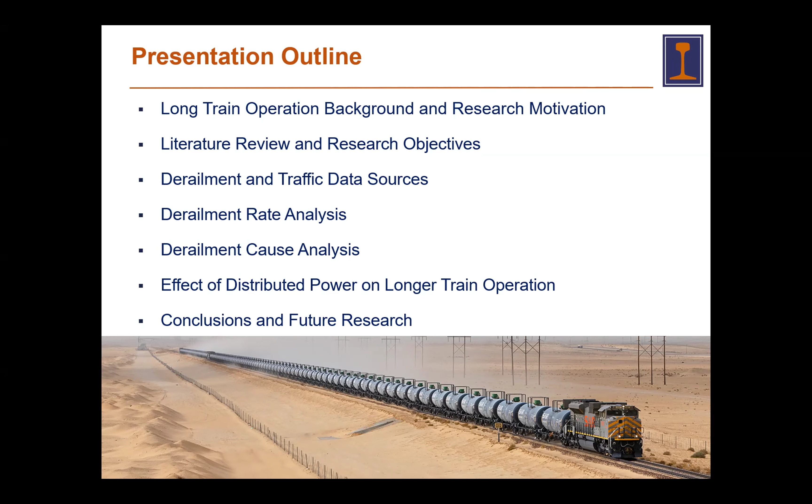Here's my presentation outline. I'll start with U.S. longer train operation background and research motivation, followed by the literature review and our research objectives for why we're doing this. Moving to the body, I have three main analyses, but before that I want to introduce the derailment and traffic data sources used for the rate and cause analysis. Then in the body, first we'll look at derailment rate analyses, then derailment cause analyses, and lastly I'll talk about the effect of distributed power on longer train operation. I'll conclude with conclusions and future research.

In the US, freight train length is usually measured by the average number of cars, or number of wagons. This remained steady from 1960 to 2000 at about 70 cars per train. Beginning in 2000, train length began to increase, rising about 12% over the next 20 years.

Moreover, the use of distributed power, or DP, also enabled operation of trains as long as 14,000 feet. In other words, the use of DP actually accelerated this process of adding more cars to the train.

We know there are many operational and economic benefits of operating longer trains, such as reduced operational costs and improved energy efficiency. However, they also have some operational and safety challenges. For example, operating longer trains may cause greater delays on single track corridors, potentially reducing network capacity, and assembling longer trains in the yard can complicate operations and reduce terminal efficiency.

The Government Accountability Office and National Academy both suggested that longer trains may increase risks related to train handling, brake reliability, and possibly crew fatigue. That said, derailment risk, which encompasses the derailment rate and severity—severity usually measured by number of cars derailed per derailment—associated with train length needs to be further analyzed and understood for operating longer trains.

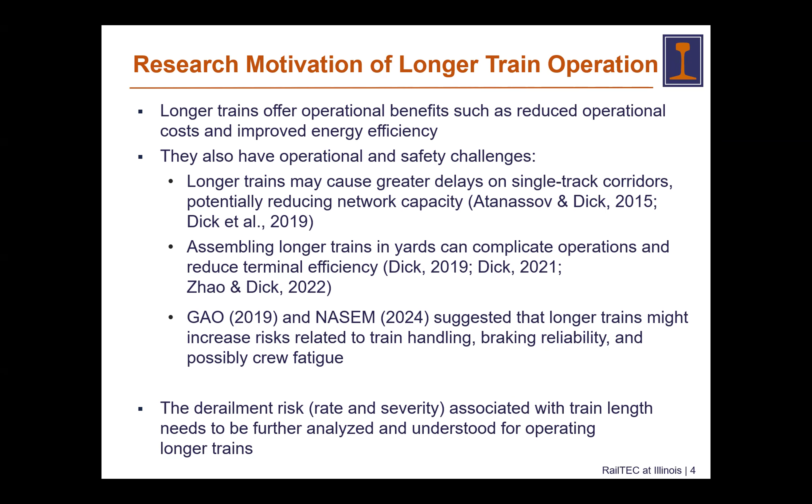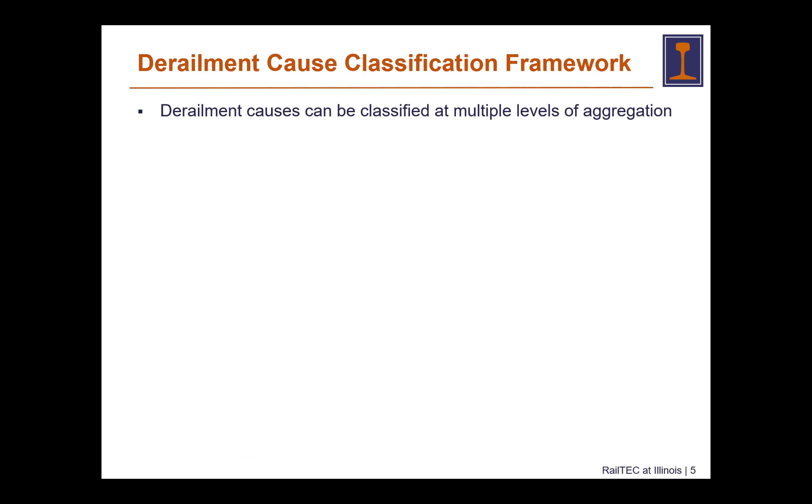Speaking of derailments, there are many causes that can lead to a derailment, and derailment causes can be classified at multiple levels of aggregation. At the bottom level, the most finer grained classification, we have the Federal Railroad Administration (FRA) train accident cause codes. FRA classifies all derailment causes into 398 unique cause codes.

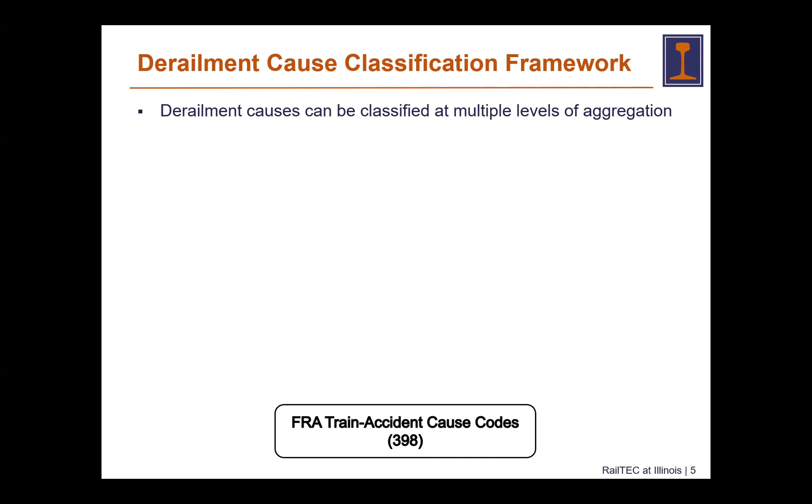On top of that, there's one also commonly used in academia: the AAR-ADL cause group method, which groups these 398 FRA cause codes into 52 unique cause groups based on similar engineering failure mechanisms and prevention strategies, established in 1996.

On top of the AAR-ADL cause groups, there's one more layer of aggregation—we can classify them into major groups. One commonly used classification method is the major cause category, where all groups are classified into either track-related, equipment-related, human factor, signal, or miscellaneous related causes. These are the 5 major cause categories commonly used in the US. In addition, there's also a classification framework called the train-mile related and car-mile related derailment cause classification framework.

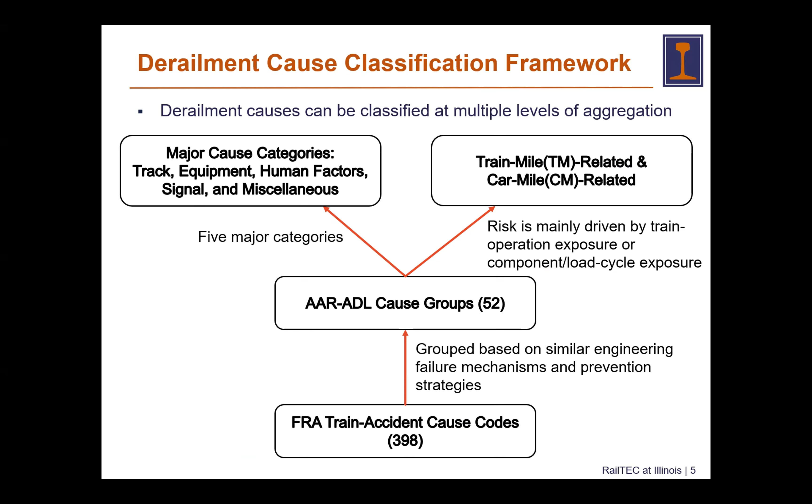So if a derailment's risk is mainly driven by train operation exposure, in other words train miles, then this derailment cause is likely to be classified as a train mile related derailment cause. On the other side, if a derailment's risk is related to component or load cycle exposure, then it is more likely to be classified as a car mile related derailment cause.

Let's dive into more details about these train mile and car mile related cause groups. For train mile related causes, those are causes whose accident opportunity is primarily proportional to the number of trains operated and the distance they travel. In other words, they're driven by train operation exposure. For example, they may include failure to obey signals, grade crossing collisions, and switching rules.

For car mile related causes, those are causes whose accident opportunity is primarily proportional to the number of cars moved and the distance they travel. So their derailment risk is mainly driven by the component or load cycle exposure of track and rolling stock. For example, they may include broken rails or welds, coupler defects, and broken wheels. Putting it another way, car mile related causes may also refer to fatigue related failures.

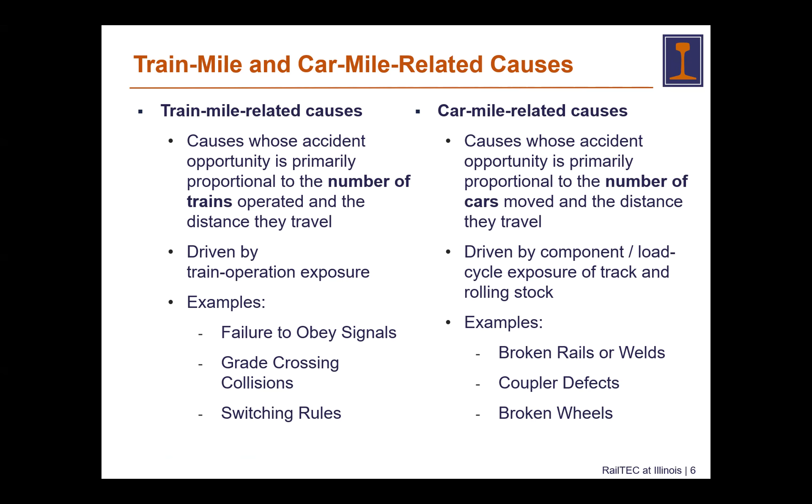In previous research, researchers have linked train length to expected derailments through train mile and car mile exposure. Wang in 2019 proposed this theory: the expected number of derailments can be calculated as the train mile derailment rate multiplied by the train miles, plus the car mile related rate multiplied by the car miles. In this slide, on the left-hand side, we have a chart giving the expected number of derailments for a single train with train length difference.

On the x-axis we have train length, and the longer the train, the higher the car mile related derailments, whereas the train mile related derailments remain constant. Since we're only operating one train, the train mile is constant.

The second chart gives the expected number of derailments for a fixed volume of traffic. If we operate longer trains, it will reduce the amount of train miles we need to travel, so the train mile related derailments will decrease. Since the total amount of cars we need to move from A to B is constant, the car mile related derailments will stay the same, as you can see in this chart.

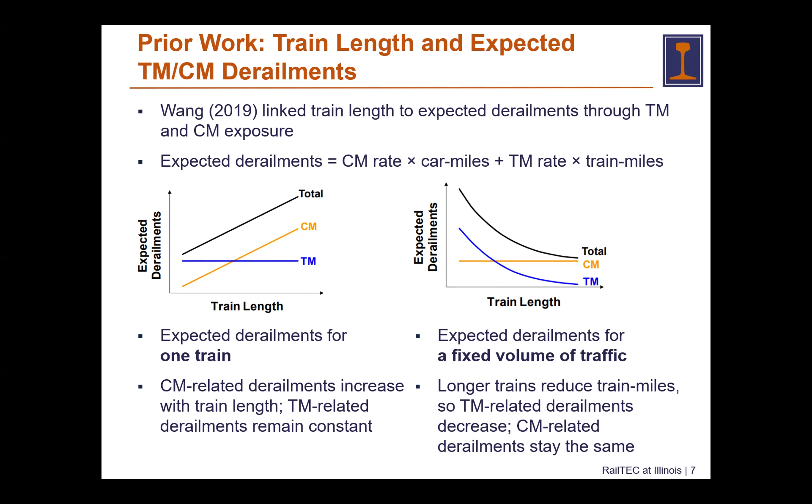So Wang really established this exposure-based framework for train mile and car mile related derailment risk estimation in 2019. However, there's a very strong key assumption in his theory: the train mile and car mile related derailment rates are treated as average rates primarily determined by traffic exposure. In other words, train length detail within each exposure group, train type, or segment level grade and curvature, none of that had been explicitly modeled or discussed in his theory.

Wang also acknowledged a possible upper limit where very long trains may increase derailment probability, but this effect is not directly estimated in his model, largely due to limited exposure data by train length and train type. So in this study, we wanted to address these gaps.

Previous studies have not directly estimated derailment rates by train length, largely due to limited exposure data by train length interval, train type, and railroad. In this study, we wanted to examine how derailment rates vary with train length, and specifically we want to answer four questions.

Firstly, what is the overall relationship between derailment rate and train length? Secondly, what is the relationship between derailment rate and train length for the three US principal train types, namely unit trains, manifest trains, and intermodal trains? Are there any particular causes associated with longer train derailment rates? And lastly, does DP reduce derailment rates for longer trains?

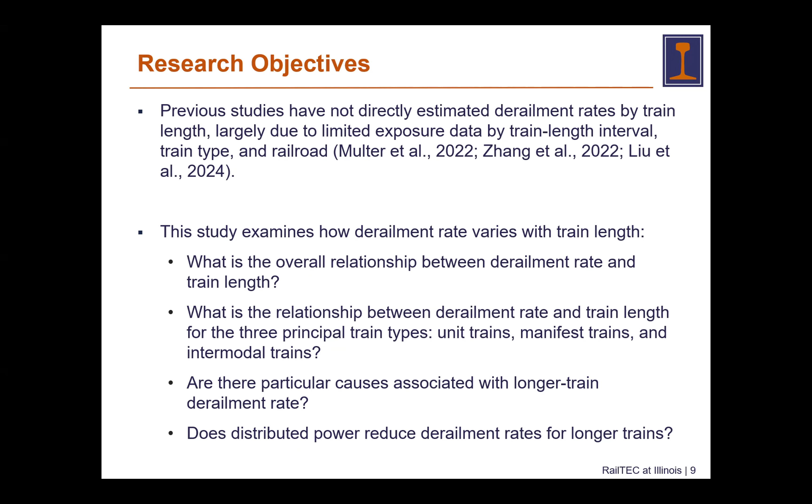Before moving on to the analysis and results, it's important to understand our data sources, namely the derailment and traffic data sources essential for our derailment rate analysis. Firstly, the derailment data: the US DOT Federal Railroad Administration, or FRA, data permits the calculation of the number of derailments by train length and number of rail cars.

Our study sample or population is Class I railroads only, and we only focused on mainline and siding train derailments. So we are not interested in any other accident types, only derailments. Our study period is between 2018 and 2025.

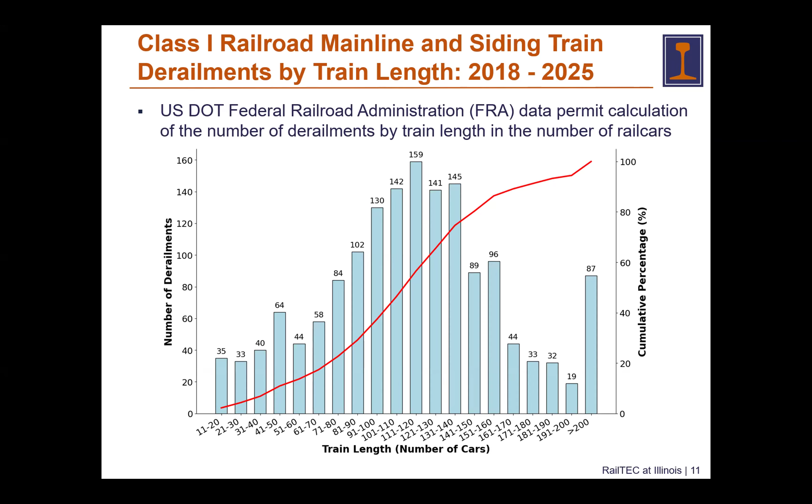In the past, detailed traffic exposure data, whether in train miles or car miles, by train length or by train type, has not been previously available to researchers. But we have been fortunate enough to have access to detailed traffic exposure data, and this is how it has been collected and analyzed within the group.

Data on train operations by train length. The traffic data was collected using the Train II system, which records railcar movement events reported to Railinc, a subsidiary of the Association of American Railroads. In the Train II system, these movement events are triggered when rail cars and trains pass automatic equipment identification, or AEI, readers.

So we have these car level event observations, and within the group we have an algorithm that aggregates these car level events into train level observations. Our definition is that whenever a set of rail cars are reported together more than once at different locations, they are defined as a unique train. We can do this for all car level observations in the network and group trains for the entire network.

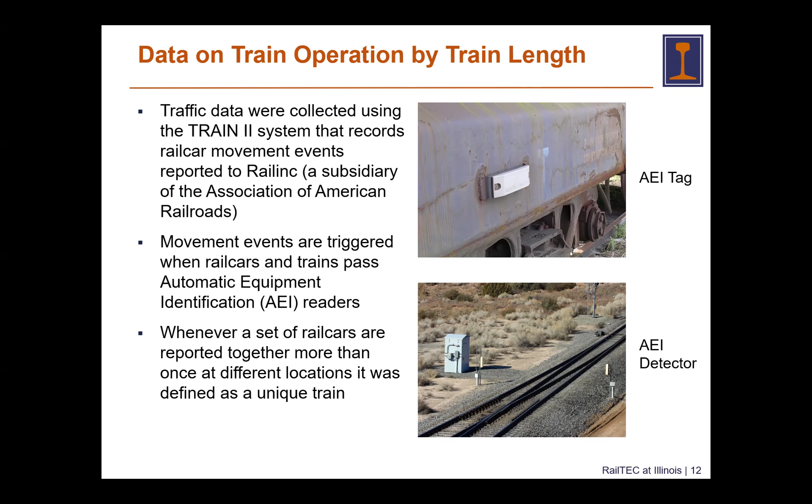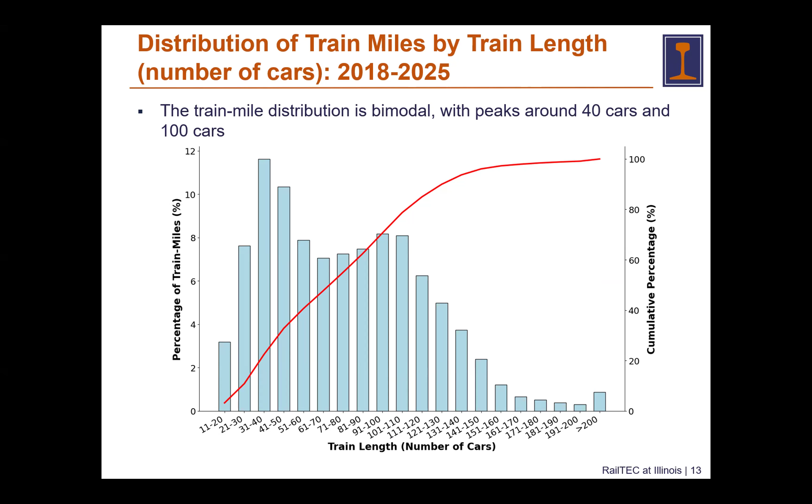In the introductory slides, I mentioned we're not only interested in studying the relationship between derailment rate and train length, but also in breaking them down by different train types, to see the train type effect. In the US, there are three principal North American freight train types: unit trains, manifest trains, and intermodal trains. Unit trains consist of similar rail cars carrying a single commodity, typically moving from one origin to one destination. In our traffic data, roughly 25.5% of all trains are unit trains.

Manifest trains are defined as trains carrying different commodities, in contrast to unit trains, using different types of rail cars and usually serving multiple origins and destinations. In our traffic data, manifest trains consist of the largest proportion, roughly 58% of all trains. The third type is intermodal trains, a special type of unit train carrying intermodal containers or trailers, typically on flat cars or well cars. They consist of 16.8% of all trains in the traffic data.

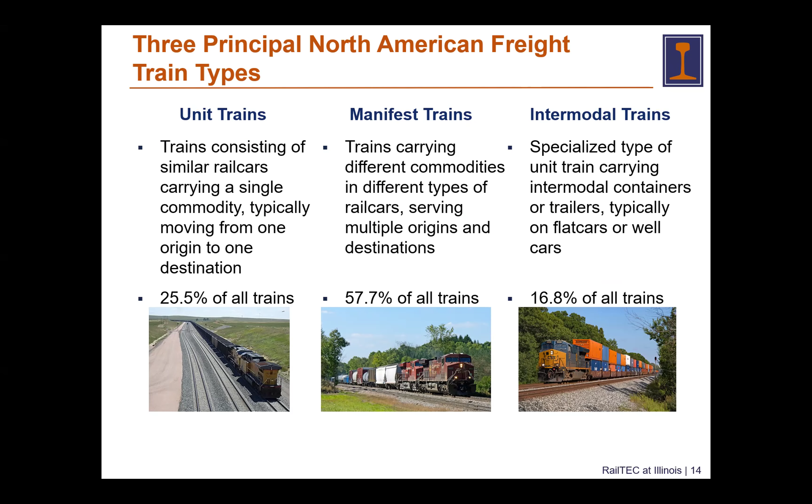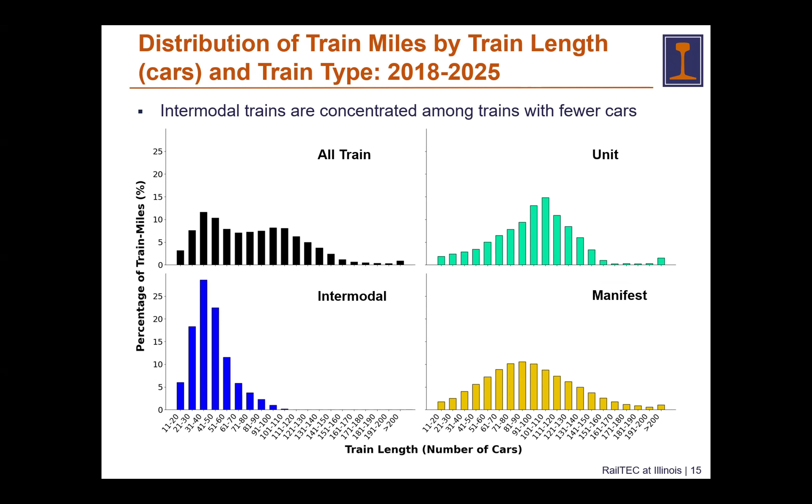So I'm going to introduce the idea that measuring train length by number of cars can sometimes be misleading. The wide range in freight car length means that the linear length of a train can vary widely depending on the type of rail cars in the consist. For example, I have two extreme cases here.

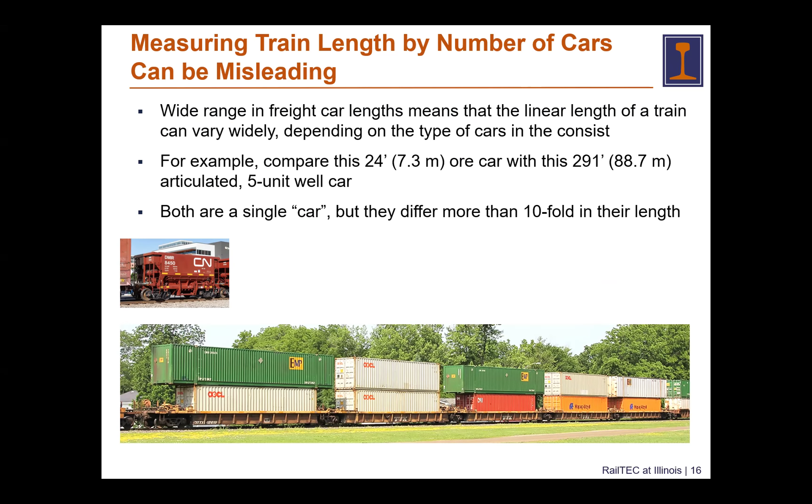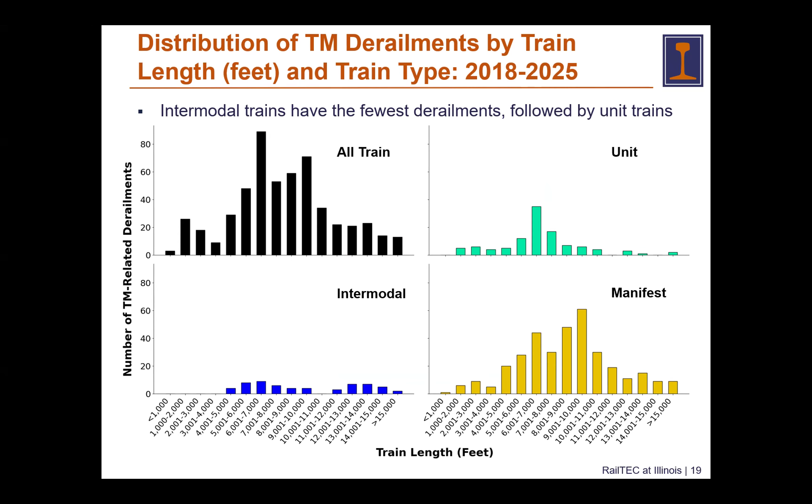Similarly, this slide shows the train mile related derailments by train length and train type. Again, intermodal trains have the fewest derailments, followed by unit trains.

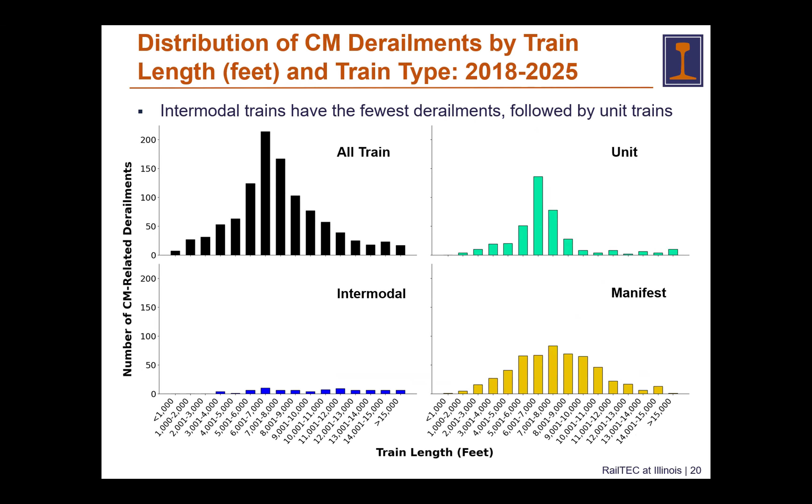All right, so now we have enough background for our traffic and derailment data. Now let's really move on to the results section. The first part will be the derailment rate analysis.

To remind everyone again, in this study we have two types of derailment rate metrics. The first is the train mile related derailment rate, calculated by the number of train mile related derailments divided by a million train miles. The second is the car mile related derailment rate, calculated by the number of car mile related derailments divided by a million car miles.

Again, we can break them down by train types. This chart shows you the train mile related derailment rates by train length and train type, and the clear association remains, right?

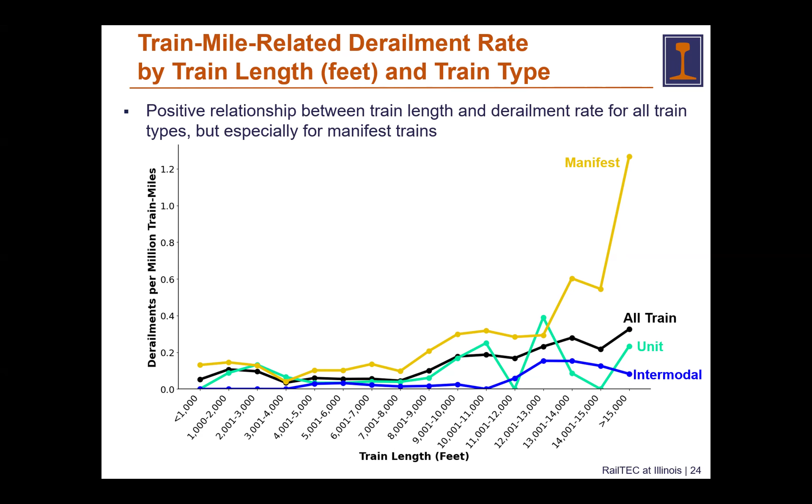Still, on average, unit trains remain the second highest derailment rate compared to intermodal trains. Similarly, this chart shows the car mile related derailment rate by train length and train type. Not surprisingly, as we saw in the overall chart, no relationship between train length and derailment rates for all train types was observed. But generally, manifest still has the largest derailment rate, followed by unit and intermodal trains.

So these are all the empirical results. We're going to build some statistical models to quantitatively evaluate the train length effect, the train type effect, and since we have 8 years, we're also going to study the year effect.

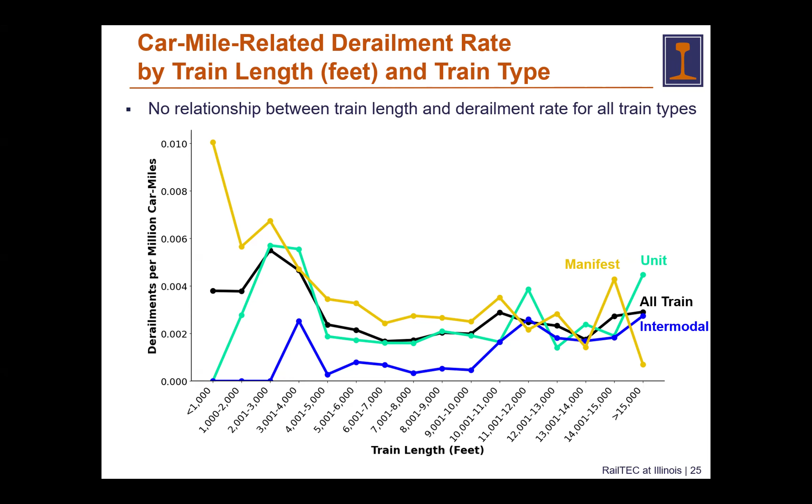The modeling result is also not surprising. Both train length and train type effect show a significant relationship. With the interaction term considered, this is how we interpret them: the train length effect differs by train type, which is exactly contributed by the interaction terms.

For unit trains, each additional 1,000 feet increase is associated with about 9% higher train mile related derailment rate. For manifest trains, each additional 1,000 feet is associated with about 21% higher rate. And for intermodal trains, it is 25% higher. Again, this is not suggesting that intermodal trains have a higher derailment rate compared to manifest and unit -- this is only giving us the rate of increase, not the absolute derailment rate. As we saw previously, it's really manifest trains having the highest rate.

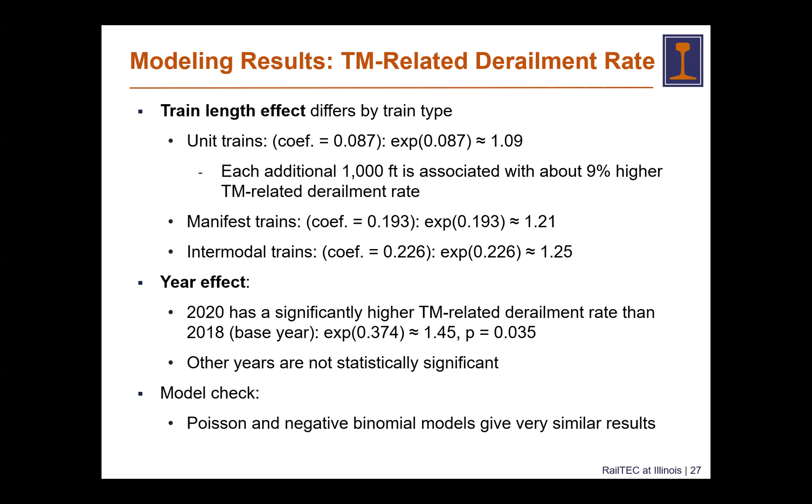Similarly, we can fit the same or a similar model for car mile related derailment rates. In the previous slide, we saw there's no significant relationship between train length, so I didn't include the interaction term here. I only have the length effect, train type effect, and year effect. The model result is also not surprising.

Train length is not significantly associated with car mile related derailment rate. The p-value is really large, 0.8, suggesting that the car mile related derailment rate per car mile is approximately constant across train length. However, we do see this train type effect: manifest trains have about 60% higher car mile related derailment rates than unit trains, and intermodal trains have about 51% lower car mile related derailment rates than unit trains. The year effect: car mile related derailment rates in 2024 and 2025 are significantly lower than in 2018, by 34% and 37% respectively.

If we want to visualize these two statistical models, this is how we can do that. This chart shows the predicted train mile related derailment rates by train length and train type. Universally, manifest trains have a higher derailment rate than unit and intermodal, and generally unit trains have a slightly higher derailment rate than intermodal trains. But intermodal trains start to have a higher rate at very long train lengths.

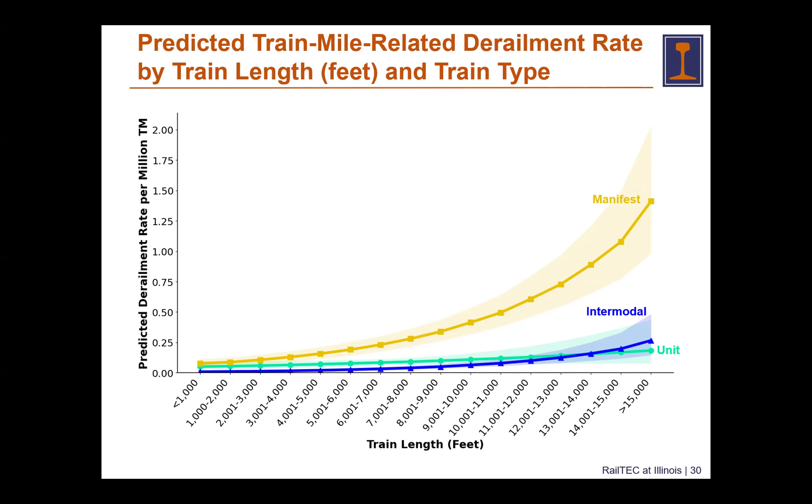So in this part, we analyzed the derailment rate by train length and train type, split into car mile and train miles. We learned there is a positive association between train length and the train mile related derailment rates. But it's more important to know why, right?

This leads to the second part of this presentation, where we dive into these causes and do a derailment cause analysis to see what's contributing to longer train derailments. As I mentioned previously, derailments can be classified into 5 major cause categories: equipment, human factor, track, miscellaneous, and signal.

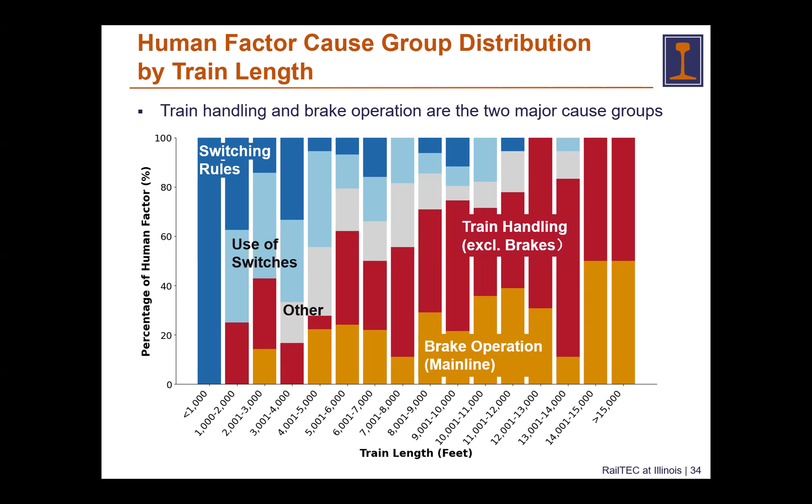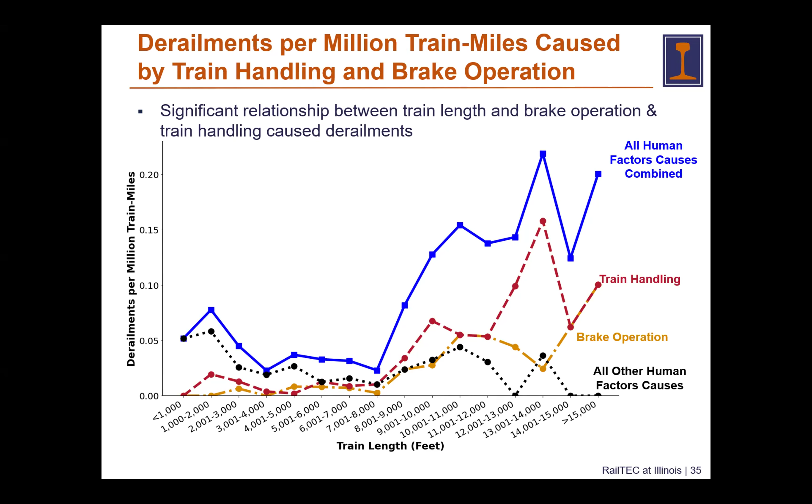Since we're breaking them down by cause group, we don't have that many data points, so I didn't include train type or year effect - only interested in the train length effect here. The normalizer, the exposure, can be either train mile or car mile, depending on whether this cause group is train mile or car mile related. Since we're doing many hypothesis tests at once, the p-values used to reject the null need to be adjusted for multiple testing. We used the Benjamini-Hochberg FDR correction, and the results are not surprising.

There are in total 3 train mile related cause groups that show a significant and positive train length effect: brake operation and train handling being two of them. These two actually have a surprisingly similar and the strongest effects. Both show about a 33% increase in their derailment rates per additional 1,000 feet increase in train length under the train mile normalization. The p-value is really small.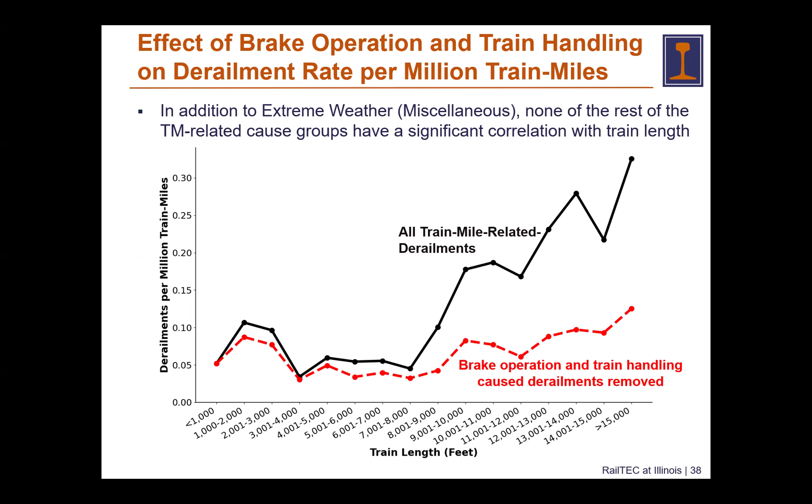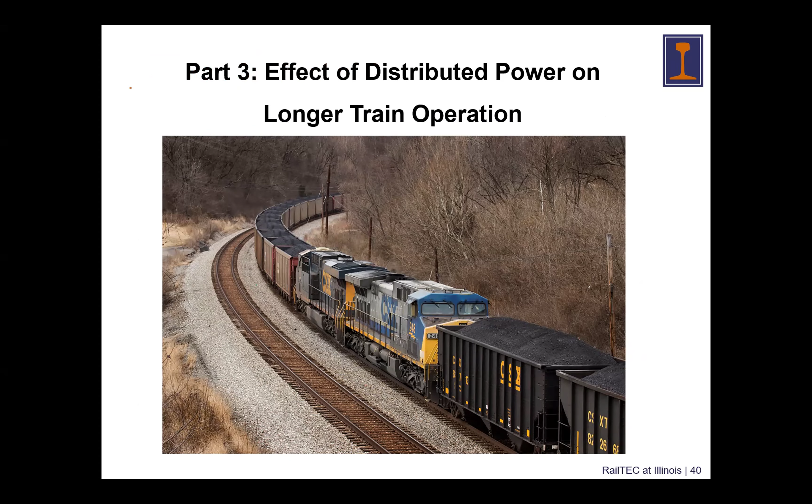This concludes our second part of the study. The third part, I'm going to talk about the effect of distributed power on longer train operation. This will also link to our just-learned train handling and brake operation related derailments. Distributed power trains, or DP trains, have their locomotives distributed along the train.

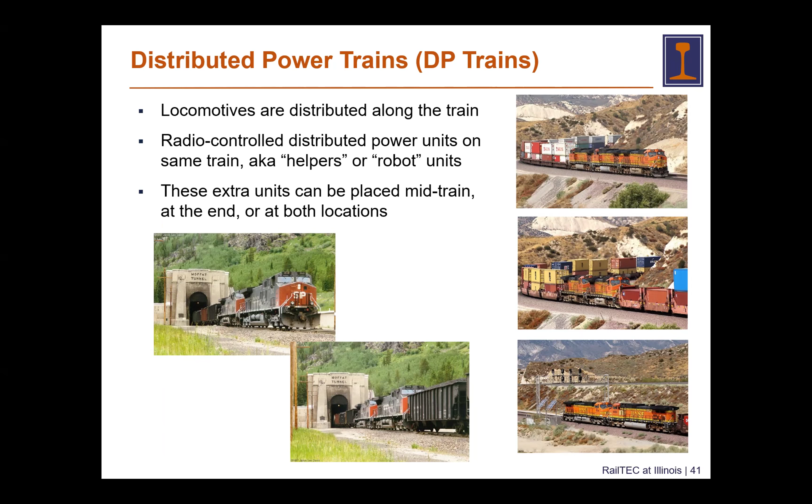They have radio controlled distributed power units on the same train, also known as helpers or robot units, and these extra units can be placed in mid train, at the end of the train, or even both locations, as you can see from the right-hand side pictures.

The use of DP in freight trains in the US has expanded substantially over the past 25 years, and major Western railroads are operating more than half of their trains with DP. This is even from an article from 2010—so 16 years later, there are more and more railroads and trains starting to use DP in their operation.

There are many advantages of using DP in longer trains. For example, they can reduce drawbar forces, and they enable longer train operations by a single crew. They are proven to be more fuel efficient, and most importantly, it improves the control of in-train forces through better initiation of train brake and train line air recharge, reducing the brake propagation time.

This last bullet point, if we think about it, is really related to those brake operation and train handling related derailments that we saw previously in the second section, where they contribute to longer train operations. So in theory, the deployment of DP should, to some extent, mitigate these train handling and brake operation risks.

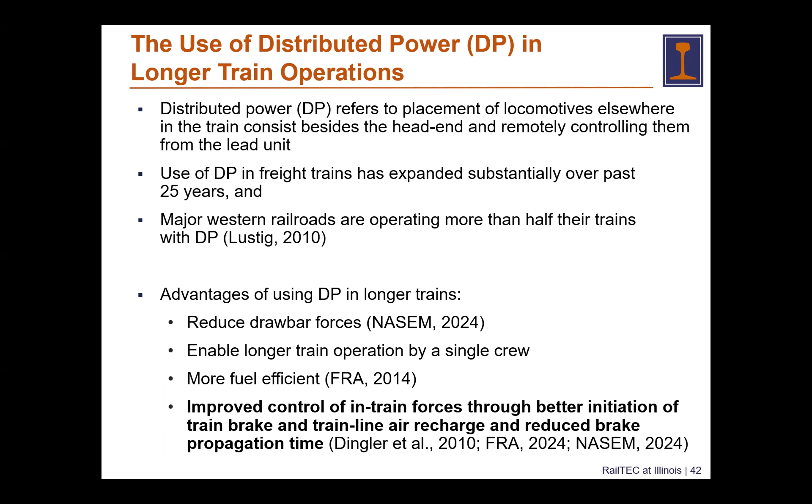But in the past, due to the lack of detailed train exposure data by train length, train type, and DP status, no research has done any empirical or quantitative evaluation of the effect of DP on train handling and brake operation related derailment rates. We were fortunate enough to collaborate with one of the Class Ones in the US, and we were able to obtain both their traffic and derailment data between 2014 to 2023 to evaluate the effect of DP on train handling and brake operation, and we add one additional cause group here, which is car coupler defect derailment rates.

Car coupler defects is also a cause group related to train handling. For this specific railroad company, car coupler defects also show a positive and significant relationship with train length, which is why we decided to include car coupler defects as an additional group here, to increase more data points and increase our statistical power.

So we fitted a similar model and controlled for train type, train length, and this time we also included an additional variable, DP status. The chart shows that DP trains have significantly lower predicted derailment rates after controlling for train length and train type, whether or not we include intermodal trains. This mitigation effect became more pronounced for longer trains as well.

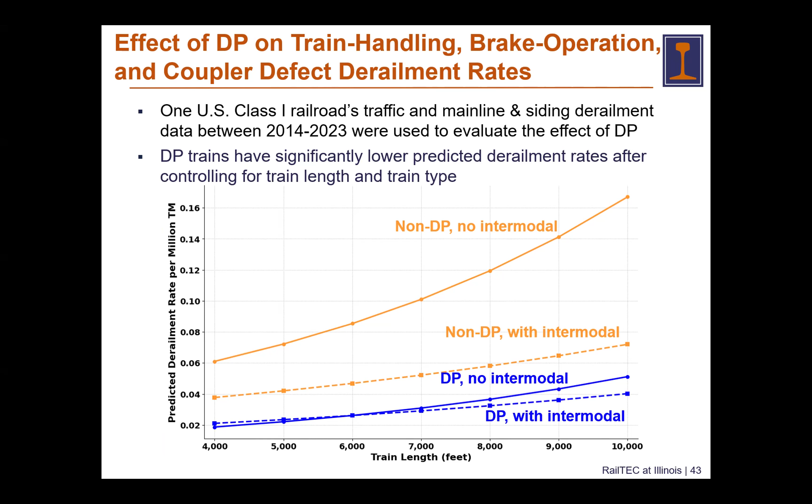All right, that's all I have for the main content. So in conclusion, in this study, mainline and siding derailment rates for US Class 1 freight trains from 2018 to 2025 were analyzed.

Derailments were modeled separately for train mile related and car mile related causes, while controlling for train type and train length. The results show that train mile related derailment rates have a significant positive train length effect, while car mile related derailment rates do not show a significant train length effect.

For train type effect, manifest trains have significantly higher derailment rates than unit and intermodal trains, while intermodal trains have the lowest overall rates. However, intermodal trains show the fastest increase in train mile related derailment rate with train length.

Within these train mile related causes, train handling, brake operation, and extreme weather show significant positive associations with train length. Lastly, distributed power is associated with significantly lower train handling and brake operation derailment rates, suggesting a potential mitigation effect for longer train operations.

In the future, so today, the derailment rate model you saw is really an aggregative rate model. In the future, we plan to construct a track segment level derailment rate model, incorporating route specific factors such as grade, curvature, elevation, and traffic mixture. Today we really didn't touch on the second part of the risk analysis, which is severity, usually measured by number of cars derailed.

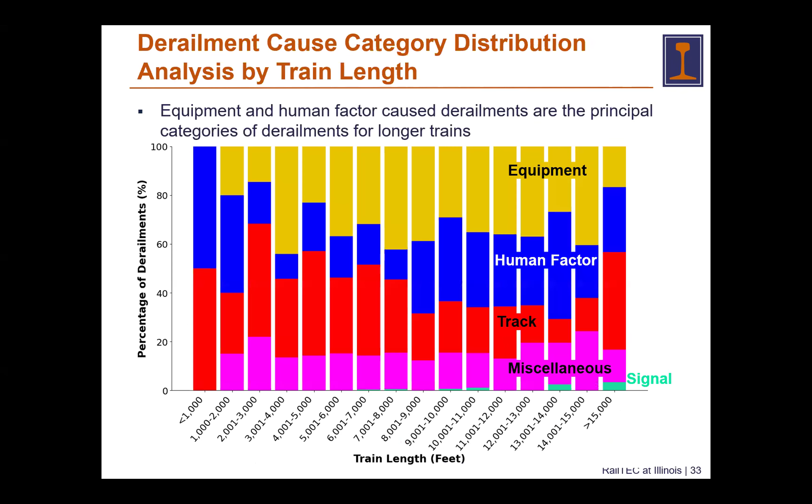I think this is mainly due to having fewer number of derailments for manifest trains at the two ends. This one is car mile related. I do have a breakdown by car mile chart in the appendices, showing car mile related derailments by train length in feet, for manifest trains. So we do see fewer derailments at the two ends contributing to that larger confidence interval.

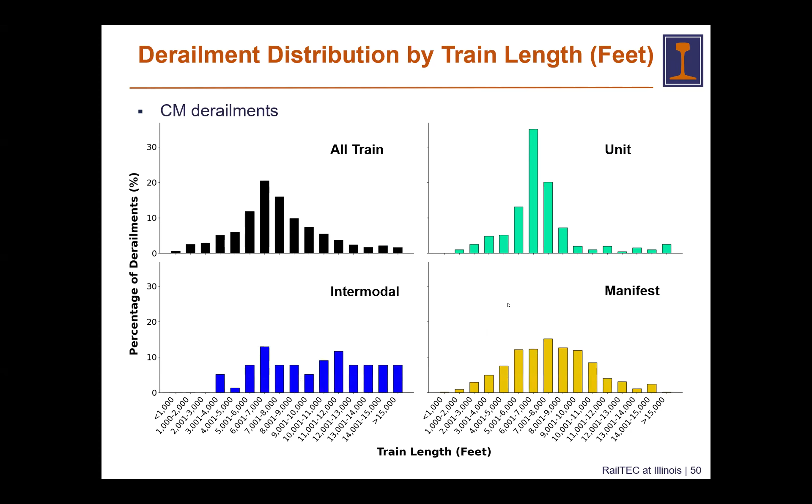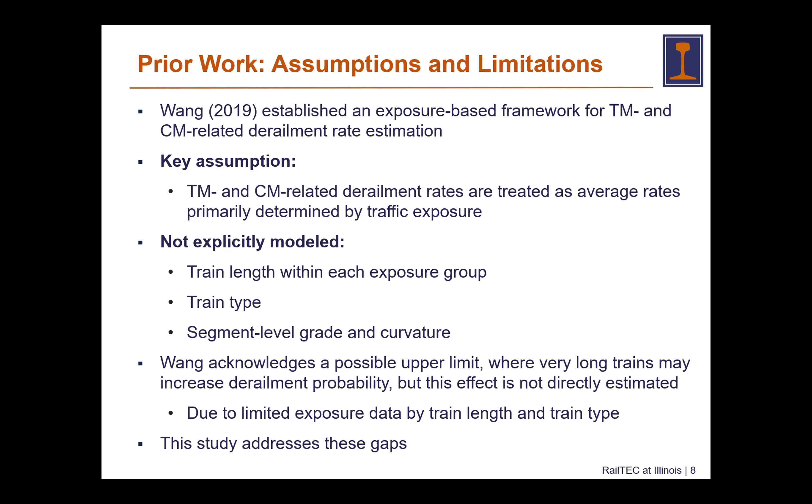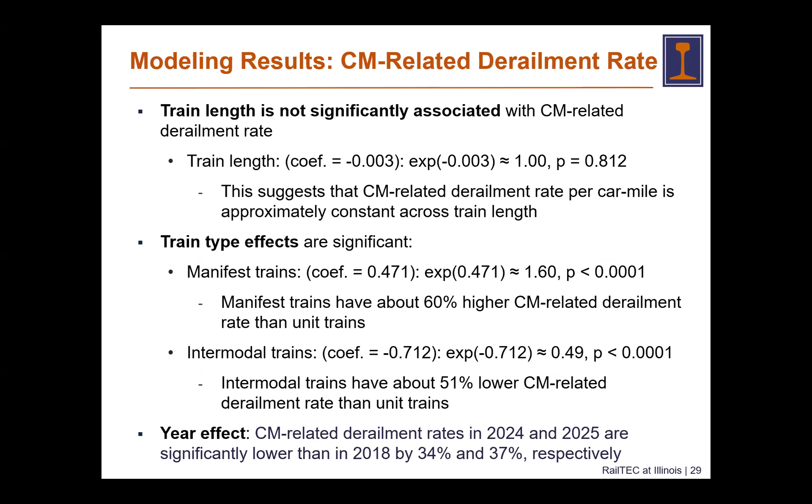I wanted to be more conservative about concluding whether longer trains or shorter trains are safer than the other. There are still some variables I can include but have not included in the model - this is still only part of the picture. There could be many potential factors affecting this, and it's impossible to include all of them, but there's still some we can include using different modeling approaches. That's something I want to do in the future.